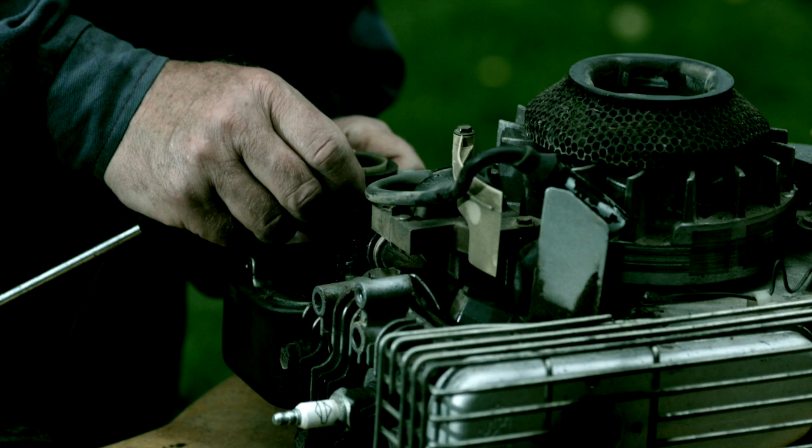This micro-credential addresses compression concepts in small engines and consists of 4 targeted skills. This targeted skill provides information about compression basics.

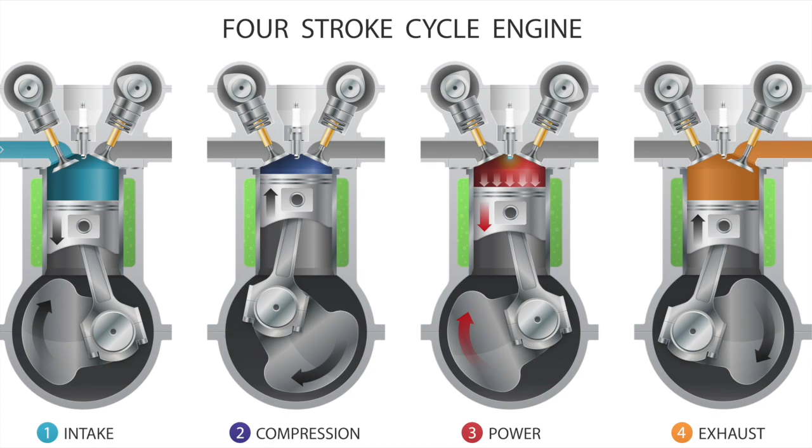There are 4 strokes of an engine that make up a full cycle. The engine must go through each of these 4 phases in an exact order so that it will start and continue to run. The first phase is the intake stroke.

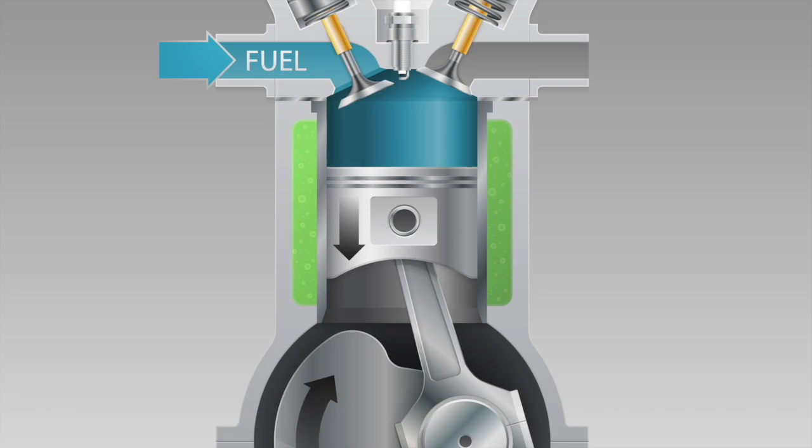The piston goes down quickly, creating a vacuum in the cylinder. The intake valve is opened mechanically and a fresh air and fuel mixture rushes into the cylinder.

The second phase is the compression stroke. The intake valve closes, trapping the mixture in the cylinder. The piston travels upward, squeezing the mixture into a tiny space.

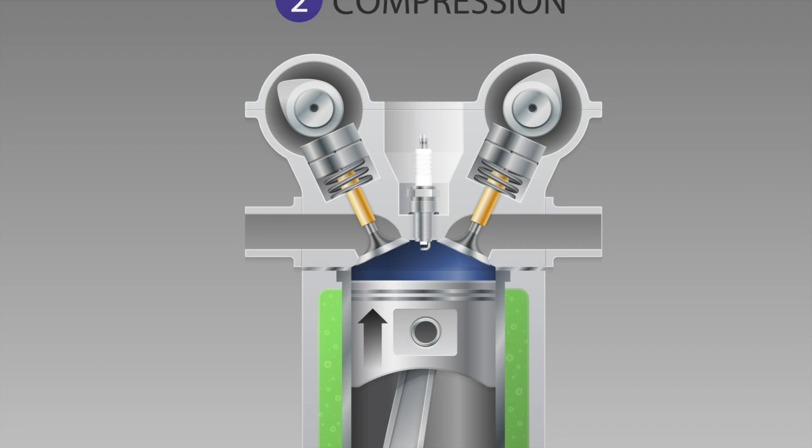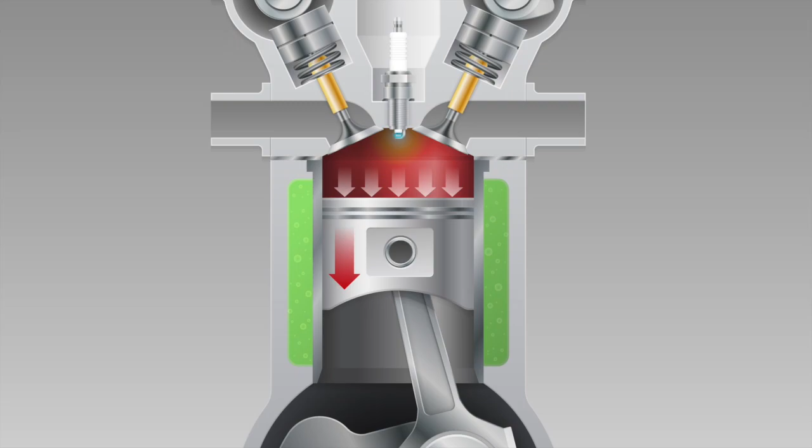The third phase is the power stroke. The spark jumps across the electrodes of the spark plug and ignites the air and fuel mixture. The resulting explosion pushes the piston down.

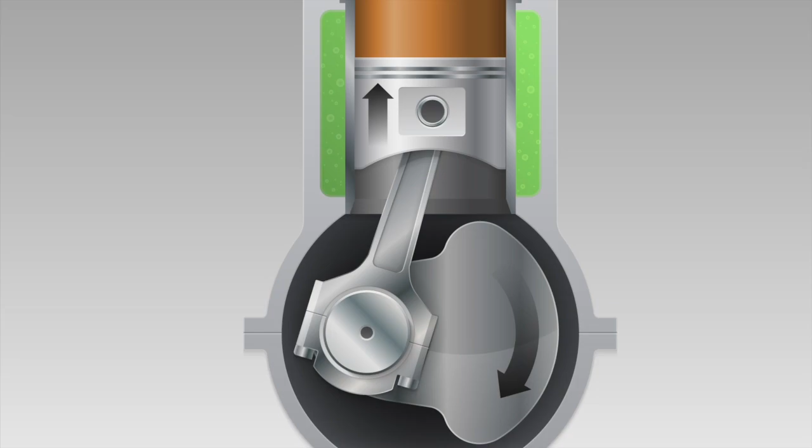The fourth phase is the exhaust stroke. The exhaust valve opens mechanically while the piston moves upward. The squeezing action of the piston pushes the now burned mixture out of the cylinder past the exhaust valve.

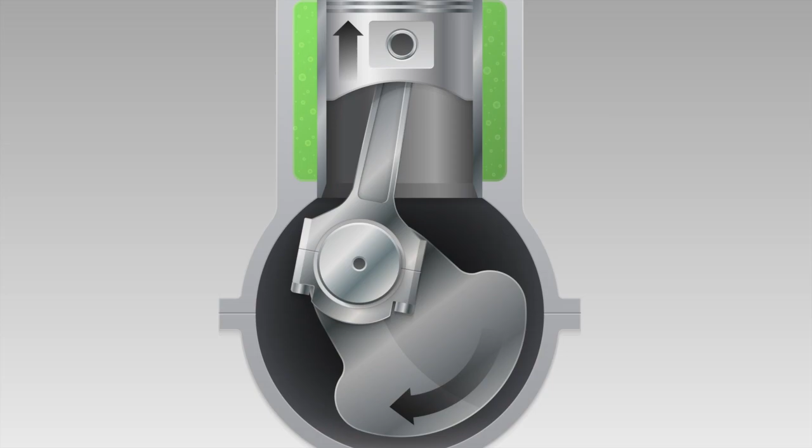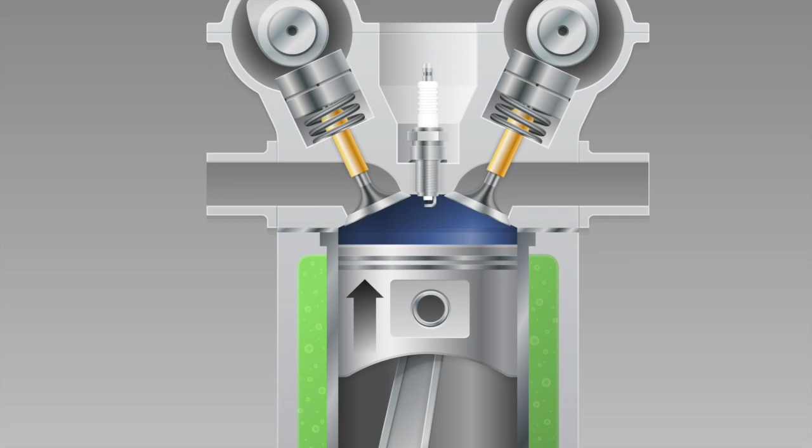The compression stroke and exhaust stroke are very similar. The piston pushes on the mixtures to make them move. During compression, both valves are closed to purposely trap the air-fuel mixture in the cylinder. However, during the exhaust stroke, the exhaust valve opens to give the burned mixture a route to leave the cylinder.

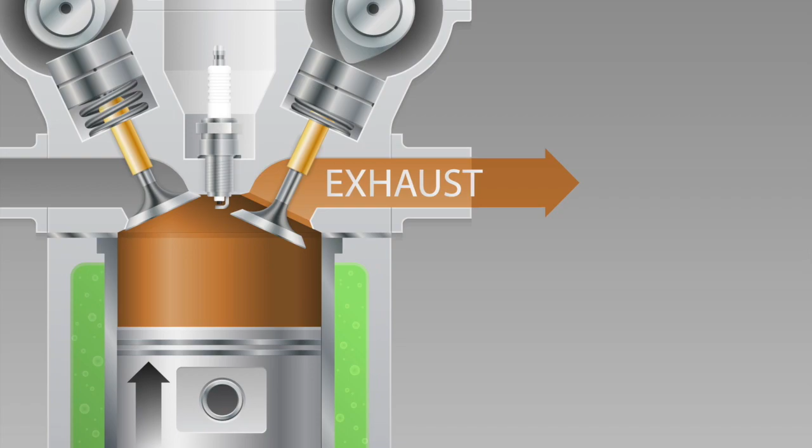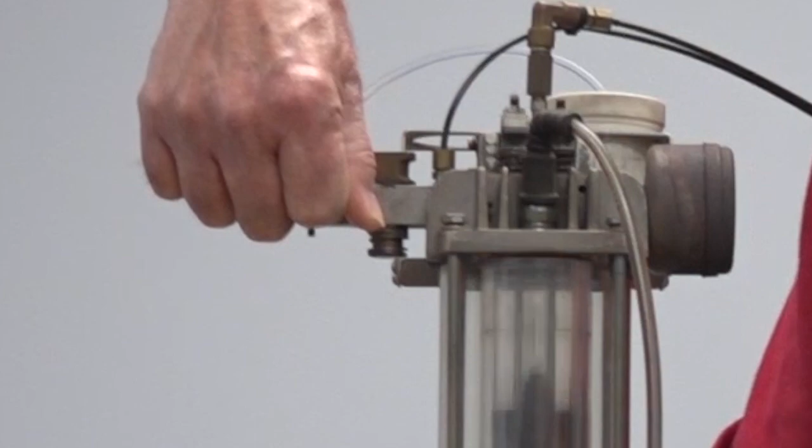If the piston doesn't compress the air and fuel mixture, it will still burn inside the cylinder, but it won't burn with enough force to move the piston. The engine needs a strong explosion to push the piston and other parts attached to it.

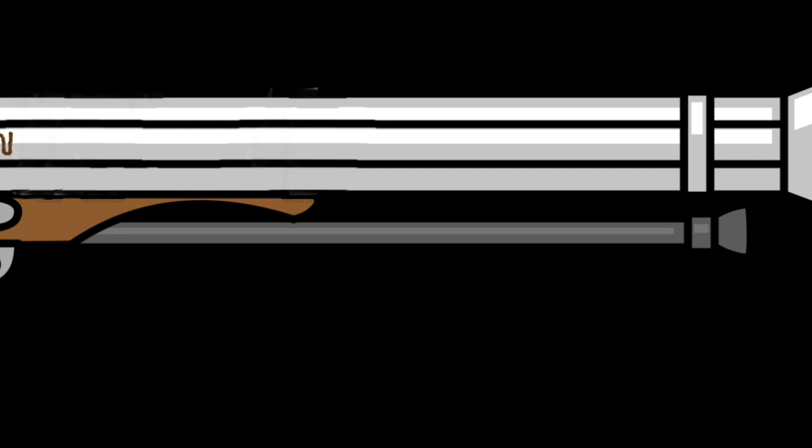For example, in a flintlock rifle, gunpowder is placed into the barrel first. A paper or small leather patch goes into the barrel, followed by the ball. A ramrod is used to pack it all together to compress it.

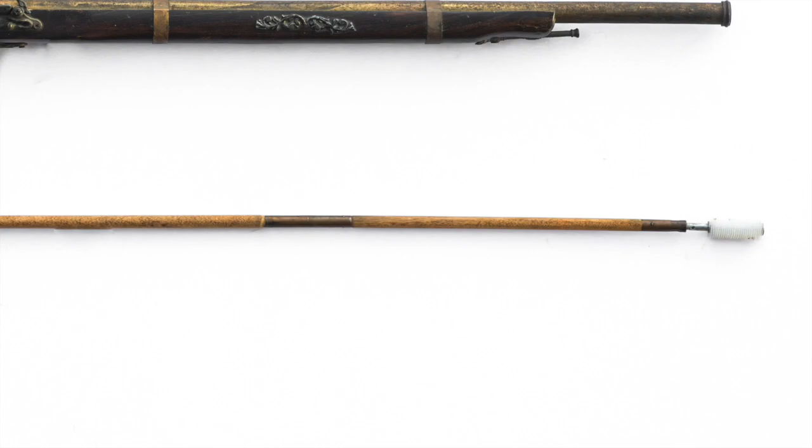Ignite the powder inside the barrel and that burning creates pressure. Pressure builds and grows until something must give. The barrel is not going to burst, but the patch and ball will yield the force of the explosion and will send the ball flying several hundred yards.

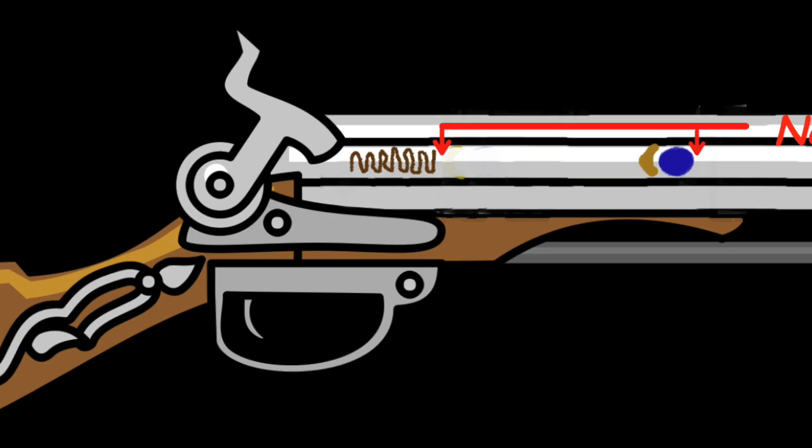Using the same rifle with the same amount of gunpowder inside the barrel with a new patch and ball, but not compacting them with a ramrod, no compression will occur. When the gunpowder ignites inside the barrel, it will burn, but it has too much space to burn. No pressure will build, and the ball may not leave the barrel at all.

A firecracker is another good example. A firecracker has gunpowder inside with several layers of paper wrapped around it. The fuse is stuck down through the paper wadding to ignite the powder.

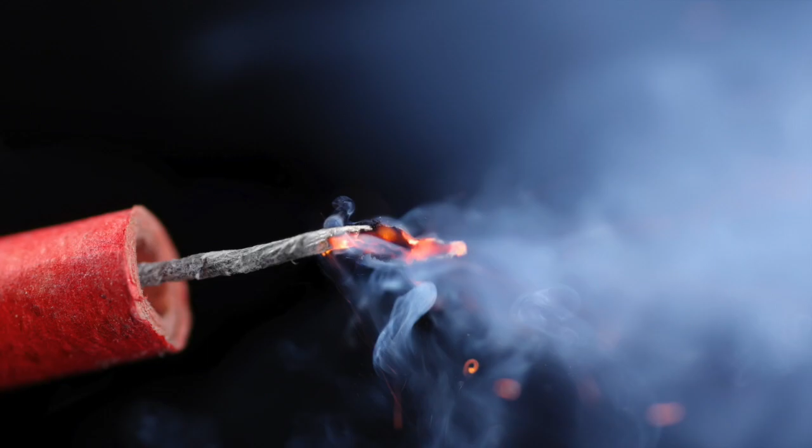Ignite the fuse and that ignites the gunpowder. The pressure builds on the inside, finally overcoming the paper, resulting in a loud bang.

Take a firecracker apart. Sprinkle the powder on a surface and do not use the paper. Lay the fuse alongside the powder and ignite the fuse. The powder will burn, but it will not make a loud bang. Why? No compression. Once again, an explosion is required, not just a flash.

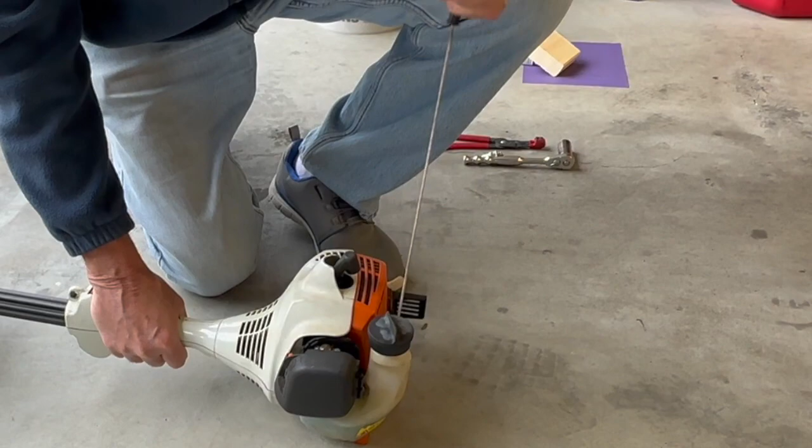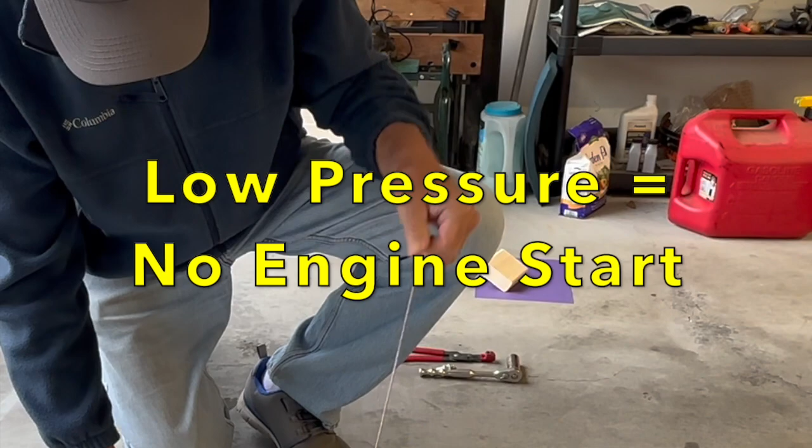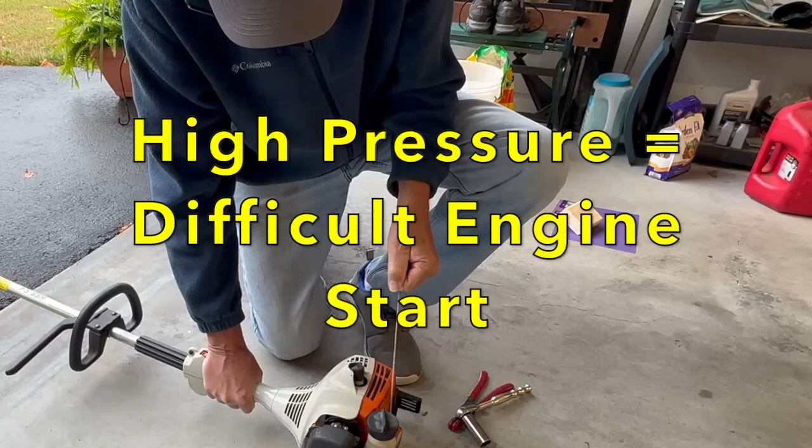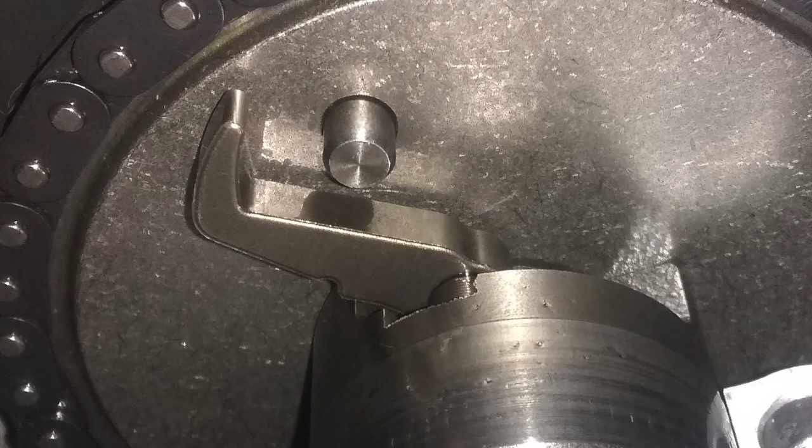High compression pressure is not desirable either. Too much pressure will make it difficult for manual or electric starters to spin the engine. Many engines with high compression ratios have a built-in compression release mechanism. A small amount of compression is vented to cause the engine to spin freely. Once started, the release is disengaged, and appropriate compression is restored for strong power output.

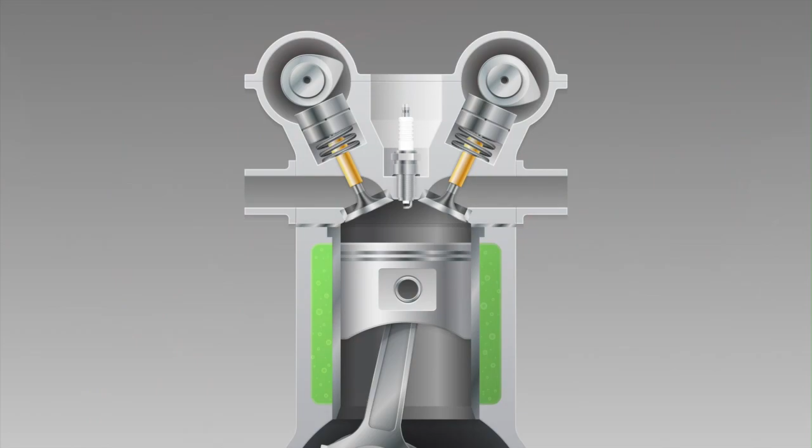Since good compression is key, that is the first area to troubleshoot when an engine won't start. Investigate the many reasons why compression pressures are low or non-existent. If no compression issues are found, then it's time to move on to troubleshooting spark concerns. Then fuel problems. Finally, remember the importance of the compression portion of the cycle. Without good compression, the engine will simply not run.